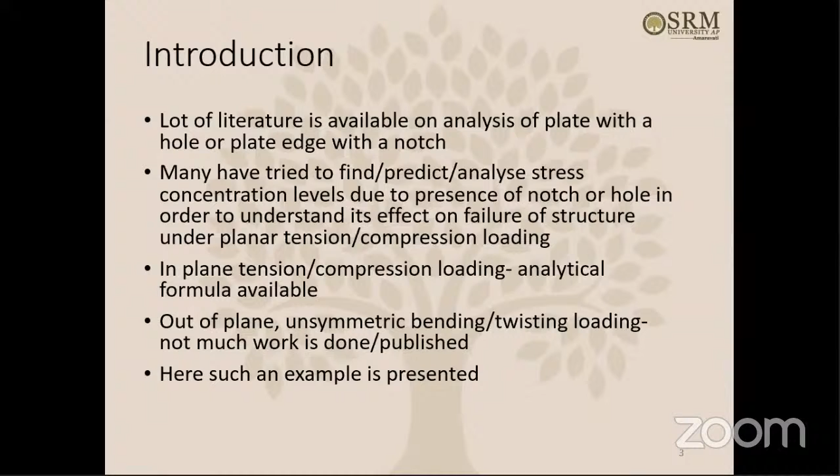So you cannot apply those simple analytical formulas or theories of tension and compression for plane structures. This is basically out-of-plane, unsymmetric bending, twisting - a lot of things are happening. So this is a blade here - as you can see, it's curved along the length and curved along the width also. One side has a leading edge made of metal, and the remaining structure is all composite.

The other side is called the trailing edge. The side on the left is called the leading edge, and the side on the right is called the trailing edge. So what is proposed here is, can we implement a wavy shape on the trailing edge side?

Why do we have to do that? If instead of the straight edge on the right side we implement a wavy structure there, that will add some aero efficiency benefit. The aero efficiency benefit is only like 0.1 to 0.2%. It's not high, but in terms of aviation it is very high because it can have a cascading impact on other things. So even 0.1 to 0.2% efficiency benefit is very high in terms of aviation.

So if we implement those wavy shapes on the right hand side of the figure, that is the trailing edge, it's going to give some benefit. How do you implement that? As you can see, the blade is not a planar structure - it is curvy both lengthwise and widthwise. The design criteria for this blade is, of course, bird strike. A bird comes and hits the leading edge, and under that bird strike loading, the blade is going to bend lengthwise and widthwise. So it's basically a bending problem.

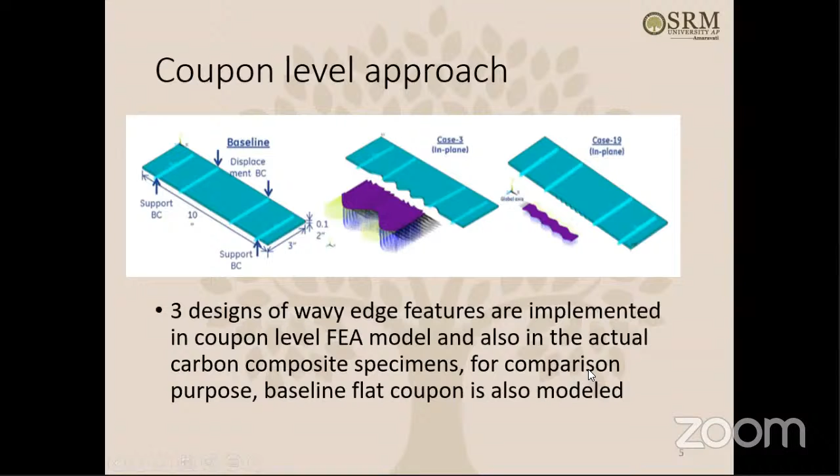We implemented this on one edge of the coupon, then did the FEA analysis, and based on this design we actually tried to fabricate the coupons. We fabricated the coupons, took them to the lab, and did this 4-point bending test. So why bending?

Because as we talked about earlier, under bird strike load the blade is going to bend lengthwise and widthwise also. So we're trying to create a similar kind of boundary condition here, a similar kind of loading condition that these coupons are being subjected to, they are bending.

Under the bending, of course you can see that the small wavy features show a different response, and the bigger wavy shapes show a different response, because when you bend the blade with bigger wavy shapes, they are not symmetrically bending. They go up and down, and also the failure happens differently.

So we put strain gauges, as you can see, exactly at the bottom point of this wavy shape. There's one strain gauge here, another strain gauge here, another strain gauge here, and one strain gauge far away from the wavy face. We put similar strain gauges on both coupons and ran the test. Strain gauges were used to measure strain level.

So what does it give us? The maximum strain far-field tension strain gauge shows these readings, then the far-field compression strain gauge, and then the scallop strain gauge. Scallop means one wavy feature we call one scallop, the second wave feature, third wave feature, like 3 scallops, 1, 2, 3, like this.

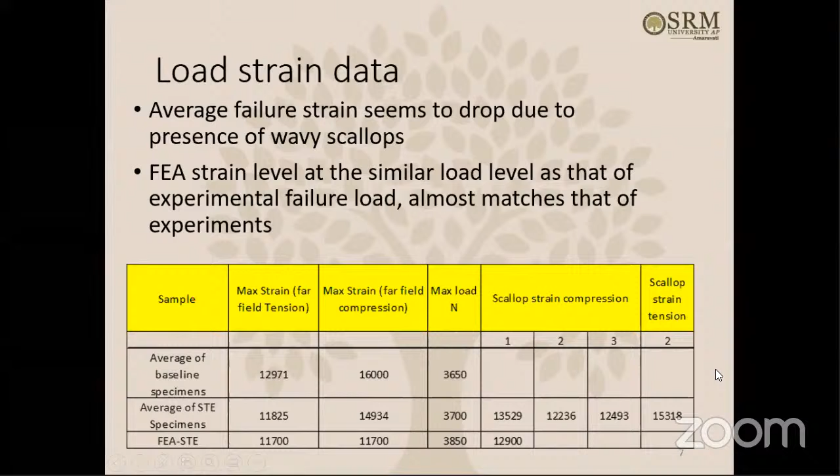So then the FEA model - there's some disturbance. Yeah, so the FEA model, as you can see, we tried to optimize it.

What we did is take the half thickness of the FEA model - if you look at the thickness here, the top half and bottom half - you just vary the modulus, the compression side modulus and tensile side modulus, and then try to match the results. That's just one way to match the experimental results with FEA, and that's what we did.

We found that trial 4 is giving good results, so that's what we use for further calculations. Then, the strain variation along the width for the baseline and other cases are plotted in FEA using the experimental failure load, and the characteristic distance is computed.

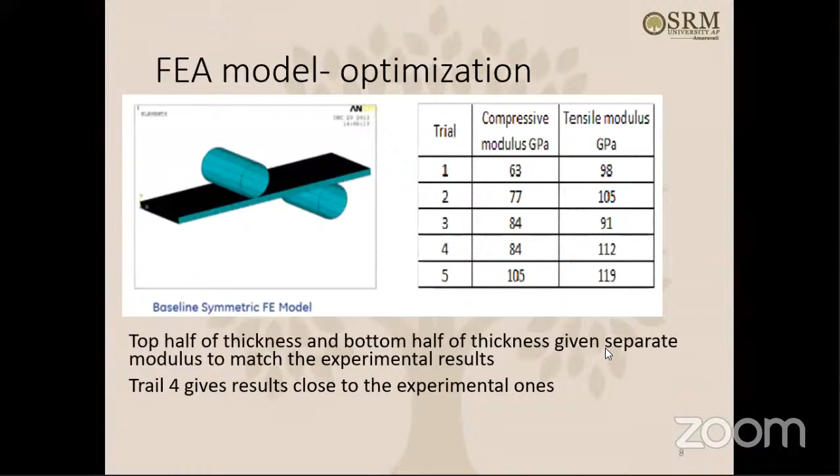If you look at the figure here, this is a coupon with a wavy feature, and there's a coupon without the wavy feature, that's the baseline. So the strain variation along the width for this wavy feature coupon and the baseline coupon - there is some distance from this bottom point along the width to the inside part, where the strain level comes down to the level that was there in the baseline coupon. That distance is called the characteristic distance.

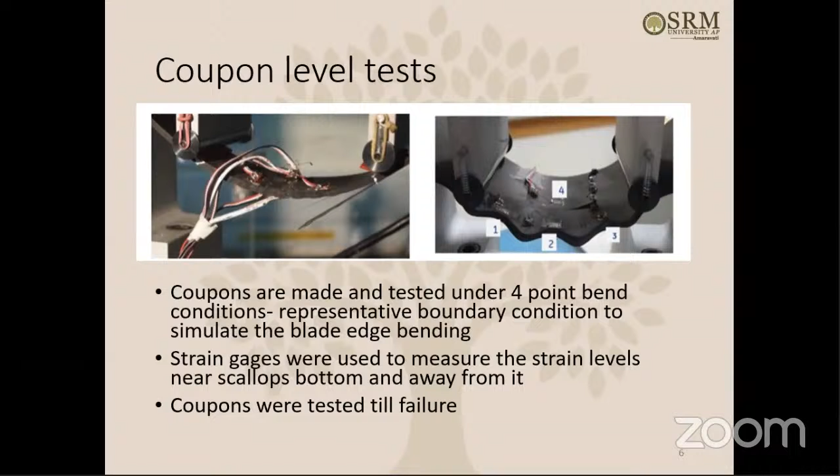So we are trying to find that distance in this analysis. The distance is like 0.25 or 0.62, for example. Compression side different, tension side different, like this, for case 3 and case 19. So based on the different variations of design, you are trying to find the distance - is it 0.62 or 0.25 millimeters?

So the load prediction at different characteristic distances is computed and plotted. That also we can do. If we have different characteristic distances, how can we predict the load? So failure loads can be predicted from the combination of experimental and FEA analysis.

Similarly, for other kinds of coupons like STE17, we can also predict the failure load at different characteristic distances using FEA and experimental analysis. And the prediction versus the real load - prediction values are very close to the real experimental failure load, as observed here.

So that's the characteristic distance I talked about. If we study the baseline coupon, case 3 coupon, case 19, STE15, and STE17 - these are just the different designs we were working on - for all these 4 designs, we compared with the baseline coupon, used the experimental results, and also used the analysis results to find this characteristic distance. The characteristic distance looks like 0.425, which is the kind of average distance that can be used for prediction of failure load for all the new cases.

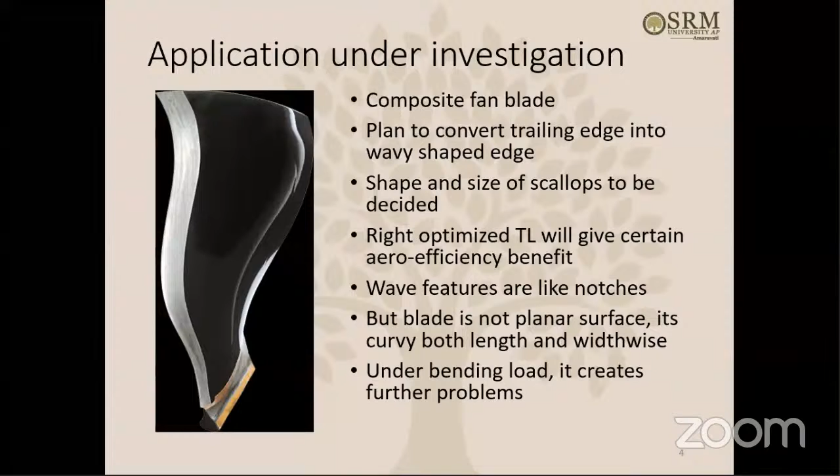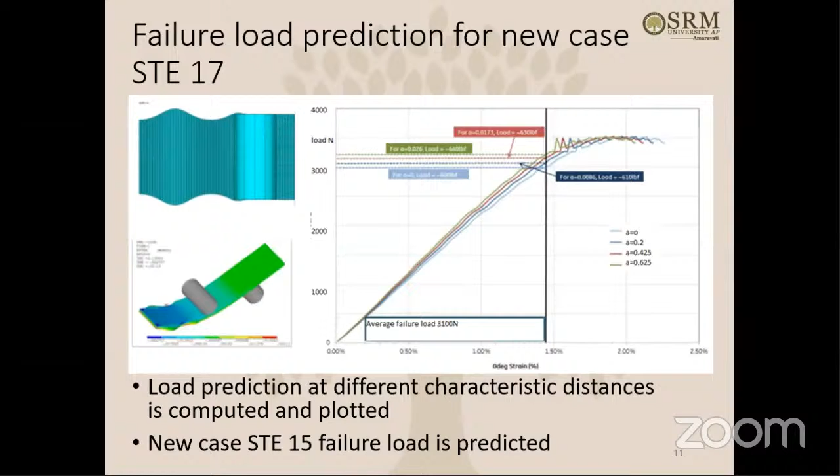If you decide to implement these wavy features on the trailing edge of the blade, you cannot manufacture the blade with, say, 25 designs of the wavy feature, because manufacturing and testing all of them would take huge effort, cost, and too many complications. That is why we are trying to develop a technique using coupon-level testing analysis, so that we can evaluate all these different designs at the coupon level itself and find out which design is better before moving to the blade.

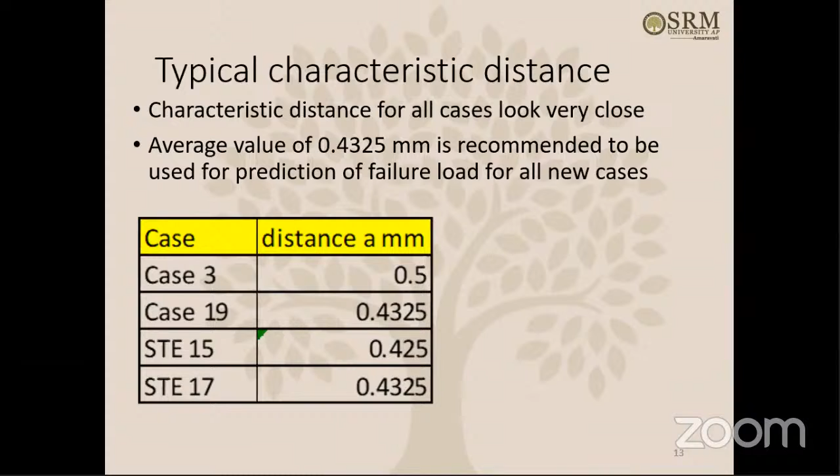So once we find this characteristic distance at which the strain variation meets the baseline level, that can be used to predict the failure load for new cases. The 0.4325 distance can be used to predict the failure load of new specimens, with no need to make new coupons and test them experimentally. That is the basic purpose of this particular analysis.

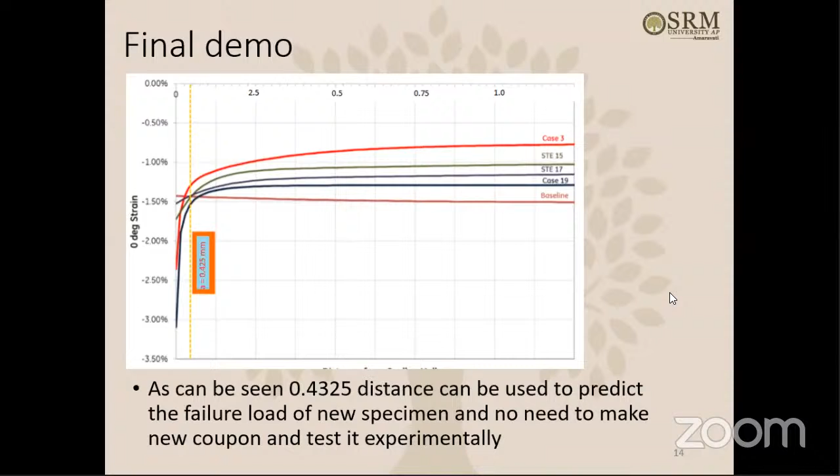So in conclusion, this is a new methodology proposed here to predict the failure load of new wavy edge specimens. How do you predict the failure load? Once we know the strain level for any new coupon, you can use the characteristic distance to predict the strain level. From the strain, you get the failure strain, and from the failure strain, you find the failure load. This methodology is proposed to predict the failure load of new wavy edge designs in the trailing edge, using a coupon-based approach where the characteristic distance is found through some initial testing of coupons.

With some initial testing of coupons, further testing of new cases of blade designs is not required. Directly, the failure load can be predicted for new designs using FEA modeling. So this is the conclusion of this work.

I have one more topic here, so let's talk about that.

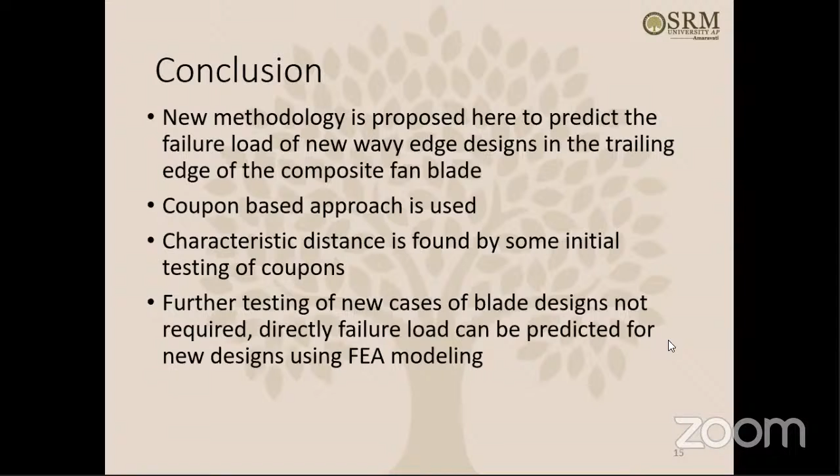So this is another topic, about indentation. You must be aware what indentation is. You use some kind of metal indenter with a conical shape edge, and you indent any material. Basically, you take a simple test system and press that indenter along any surface, and it creates some impression there. You can actually measure the load and displacement while the indentation process is on.

So how can we use this simple indentation experiment to measure the in-plane residual stresses in aerospace structures? Where does this residual stress happen in aerospace structures? If you look at the aircraft engine, there are a lot of components inside, like blades.

Not the composite blade I'm talking about - here I'm talking about the actual turbine blades. The composite fan blade is at the front of the engine, so it does not get subjected to high temperatures, that's why they use composite there. But if you look at the turbines inside the aircraft engine, all the turbine blades are made of titanium alloys, and they are subjected to very high temperature due to the combustion happening there.

So how do you measure these in-plane residual stresses on those kind of coated components? We have devised this indentation technique, and we have tried to analyze the effect of these residual stresses. So this is what the project is about.

What is the motivation? The background is that residual stresses affect the structural integrity and reliability, and indentation testing is a simple and most effective way to measure the elastic properties of bulk material.

So what exactly do we do? We study the effect of variable biaxial in-plane residual stress field on the indentation elastic properties. How do you create this biaxial field? That also we'll see - application of thermal barrier coatings, residual stresses due to thermal mismatch, and experiment design considerations.

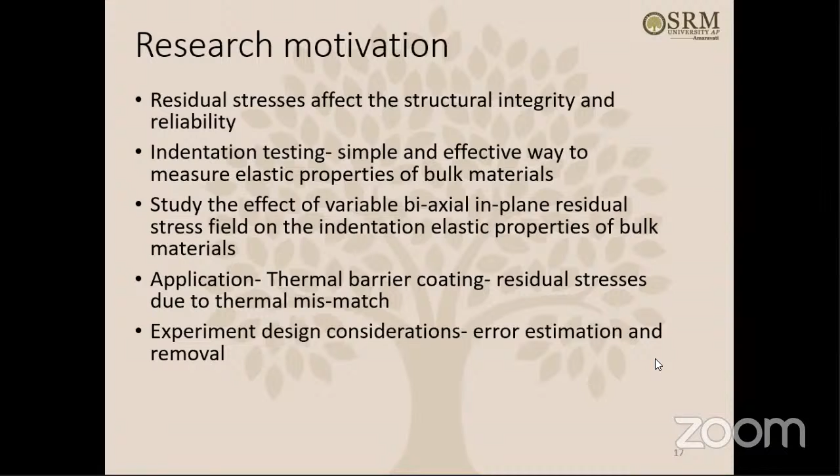While performing this kind of experiment, we also analyze other components, like what different parameters are affecting the experiment. So error estimation and removal, those things also we studied. Let's talk about it.

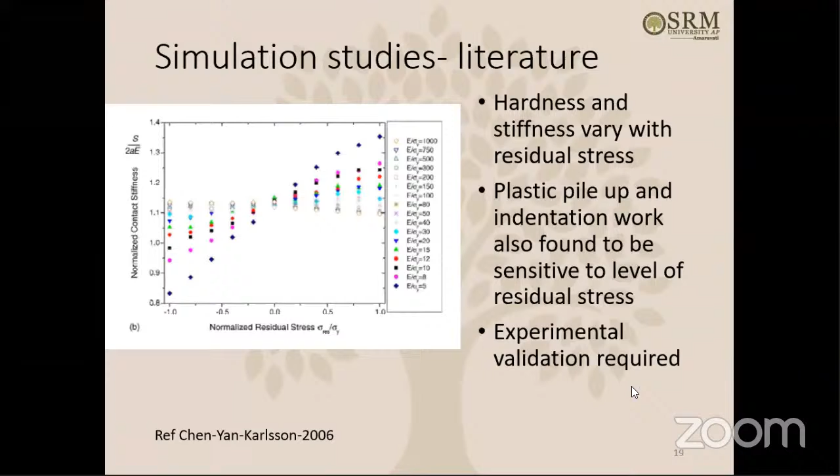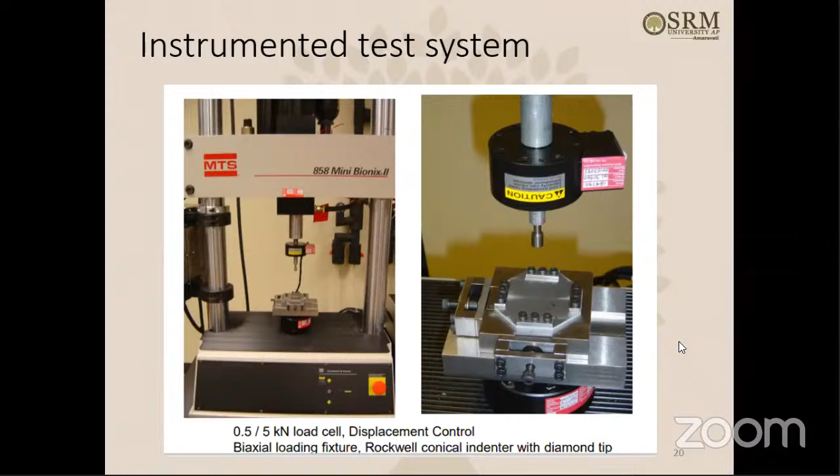So initially what we did is we did some FEA analysis on the specimen, and then designed the specimen like this octagonal shape specimen with all these holes for clamping like this. So it was designed in FEA, and then we manufactured the specimens for different materials.

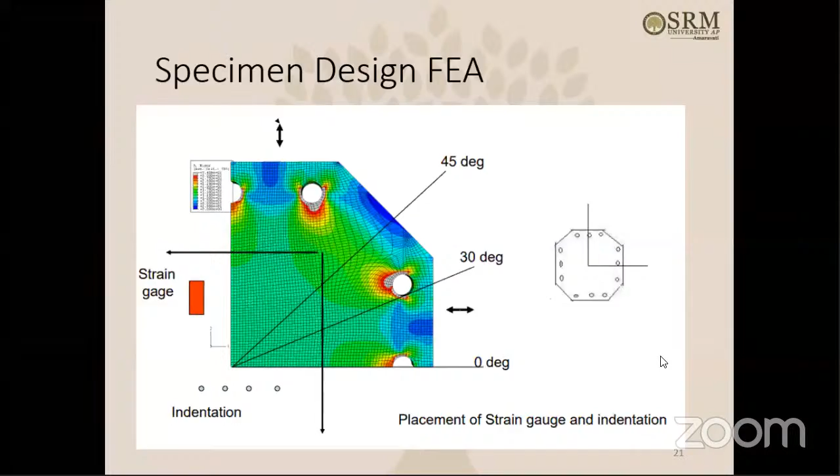And see, one side of the specimen is fixed here, this one side also is fixed. On the other side here you can apply tension or compression load, and this side also you can apply tension or compression load. So on the x-axis you can apply tension or compression, on the y-axis you can apply tension or compression, or you can have different combinations like tension X, tension Y, or tension X, compression Y, whatever it is. Different combinations you can apply - combination loading, biaxial loading.

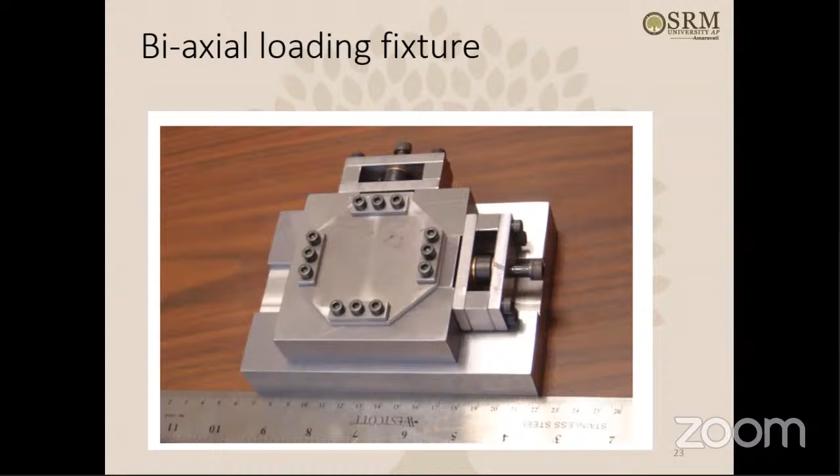So there were some errors that we found. When you do the loading and unloading plot, okay, and you test it and get a loading and unloading plot, and then try to estimate the modulus and hardness from that unloading curve, we found that there are errors in the value. So this is like if the modulus is coming as an overestimation - suppose the modulus of the aluminum is supposed to be 70 and we are getting maybe 90, 100, 150, then what is the reason? So these are the errors that we found.

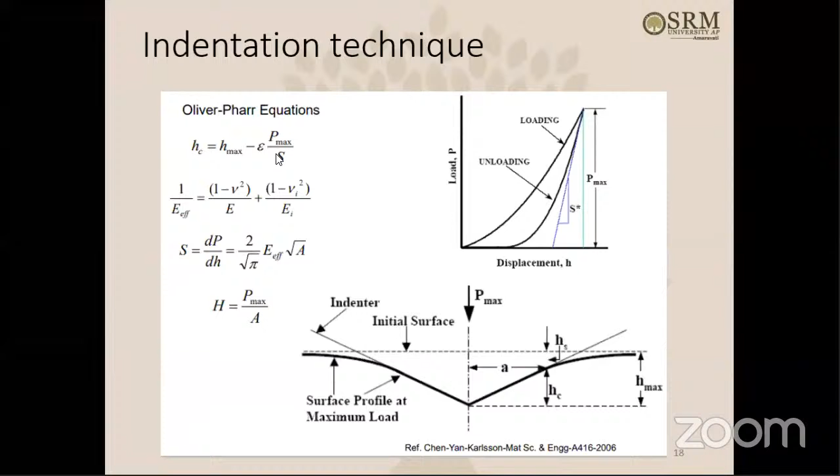Effective indenter shape - there is one geometrical parameter which ranges from 0.72 to 0.79. So depending upon that, we decide what to use. The parameter, if you see here in the equation, the parameter will be there. Here the parameter is there. So the parameter has a value and it affects the calculation.

Then pile up errors. Pile up errors - like this. So as you can see, when you indent the specimen, the conical indenter is coming down like this, and sometimes the material goes down when you indent it, and then when you pull it back - unloading - the material again goes up like this. First the material goes down, then the material goes up. So if it goes down, it's called sink-in. If it goes up, it's called the pile up. So if that thing is happening, then it shows a lot of errors.

So these errors have to be estimated properly, and then we have to come up with an approach to adjust for those errors. Sometimes it can overshoot - modulus can overshoot by 50% because of pile up errors. It's common for cold work soft metals, like large E over sigma Y, but it can be corrected. Then correction factor beta also varies within a range, so it can be adjusted, and then corrections can be done depending upon the shape of indenter, up to 10% of error in modulus.

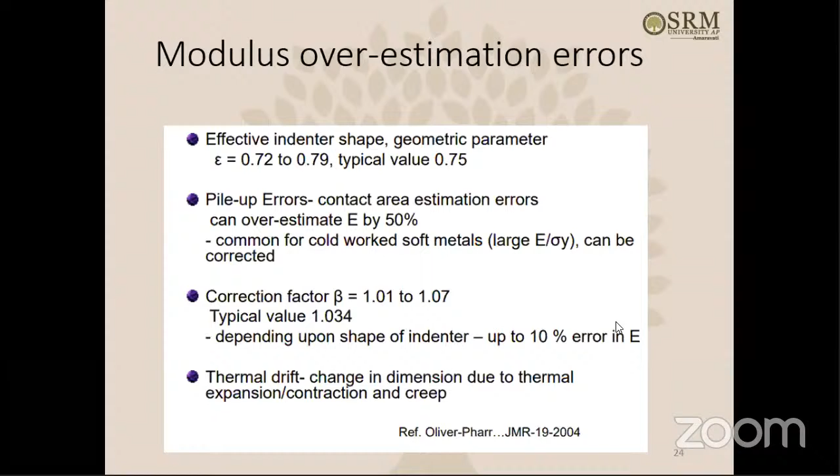Thermal drift - there is change in dimension due to thermal expansion or contraction and creep. Some materials are sensitive to this; when they are loaded, they generate some heat and thermal drift happens. So these are the errors shown here, like uncorrected and corrected because of thermal drift, or sink-in and elastic-plastic pile up - all these things are errors which are seen and which can be corrected.

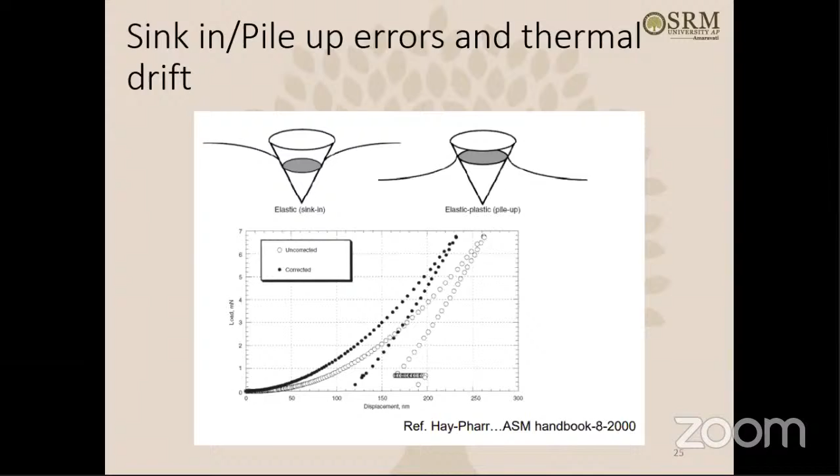Then as we talked about overestimation, sometimes it is underestimation. The modulus is underestimated in the sense that the correct value is supposed to be 70 GPa, but sometimes it is coming as 40 GPa or 30 GPa or 20 GPa - the underestimation. So what could be the errors for underestimation? Machine compliance, that is the loading frame - the loading frame has certain compliance, and something gets lost in that compliance. It can be removed by use of stiffer components, but of course it's not possible every time.

But if you can come up with some statistical correction equation, then you can use that and correct for this load frame compliance. Plate bending effect for thin specimen: if the specimen is very thin and supported on two edges, sometimes it may bend slightly. The specimen is not supposed to bend while doing indentation - it should be rigid, and the indentation should happen very smoothly. This bending effect also causes some underestimation of the modulus.

Then surface roughness, of course - if you are doing micro indentation, that's fine, like millimeters. But if you are doing nano indentation at the nanometer level, surface roughness matters a lot, particularly for spherical indenters.

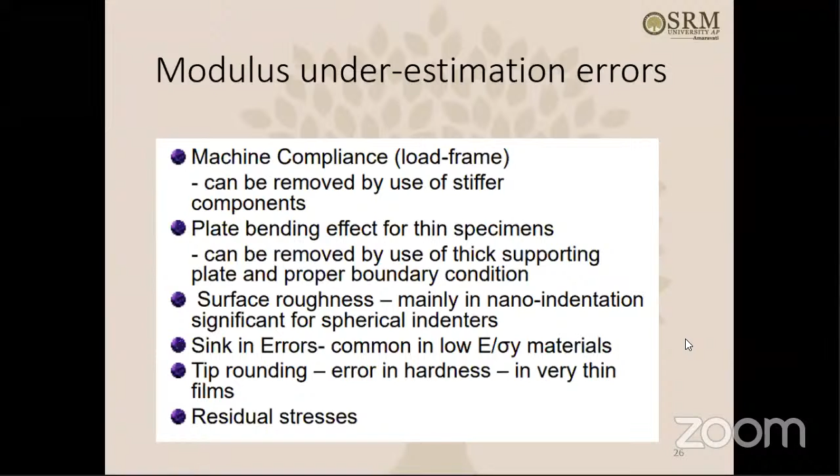Sinking errors and piling errors we already talked about. Sinking errors are common for low modulus materials. Tip rounding causes error in hardness for very thin films. Then residual stresses - these are all the reasons for underestimation of modulus.

So what we did for studying the load frame compliance is attach this indenter in a different way to the indenter holder, as you can see. This is a load cell actually, and this is the indenter. This is one type of setup - there is a steel holder, and from the steel holder there is another sleeve, connected to the load cell, and the load cell connected to the indenter. Then we tried using an aluminum sleeve here.

Instead of that, here a steel sleeve is used, and here the complete setup is different, as you can see. Different kinds of setups are used, and we saw that it affects the loading-unloading curves, and that's why it's affecting the modulus level. This shows that the load frame compliance has a big effect on this testing setup.

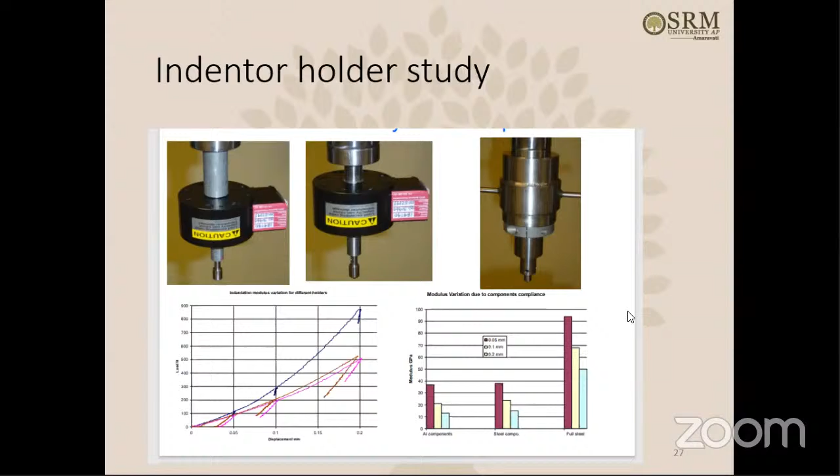Also, the effect of changing depth on the indentation modulus - if you do testing with different depths, it also shows modulus variation.

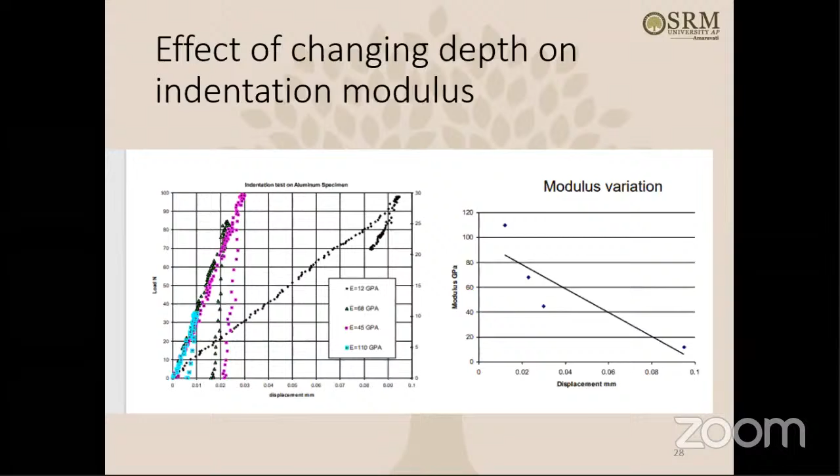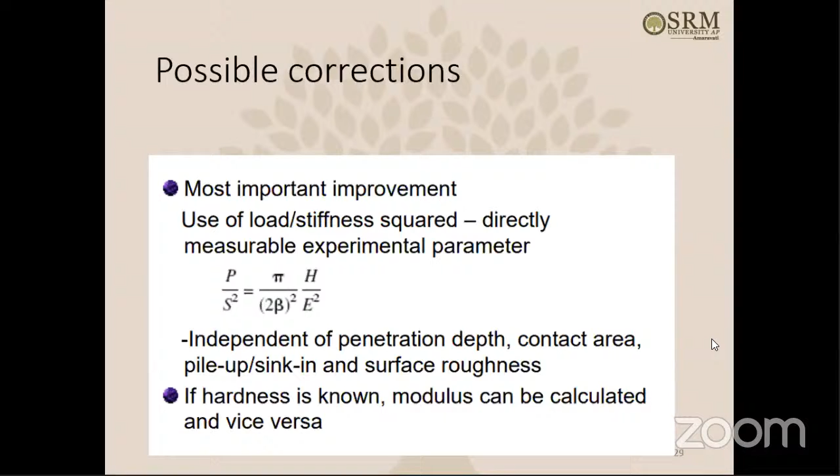So you can use this to adjust the compliance - if hardness is known, modulus can be calculated and vice versa.

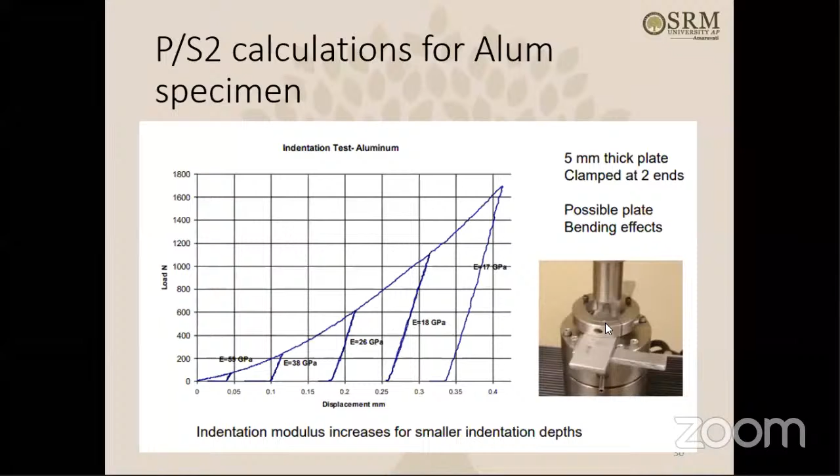Also the bending effect - if you have a specimen like this, thin, and you apply indentation, it may bend. So all those things are also there.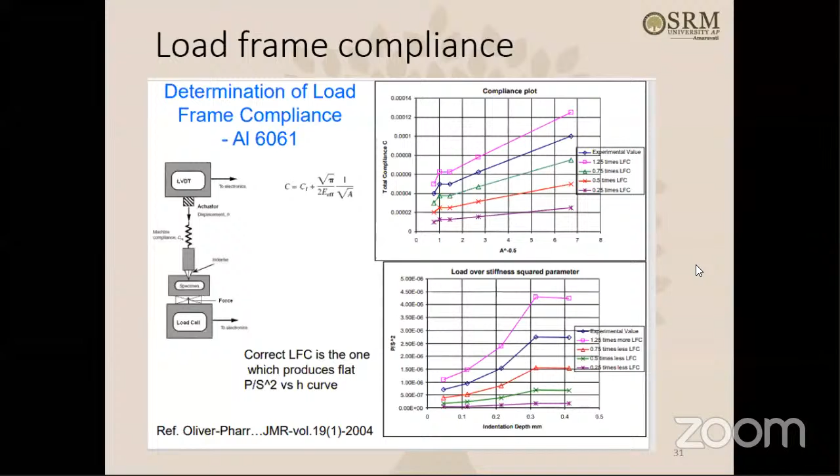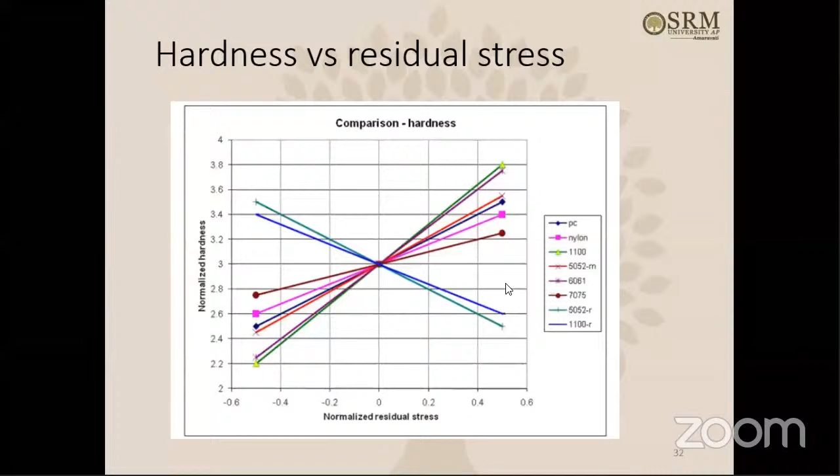This is the experimental result. It shows that as residual stresses in the material vary, some plots go from left to right increasing, while other plots are decreasing. That depends on the material—different materials respond differently. The softer materials give a different response, harder materials give a different response. This shows how the hardness varies along the residual stress.

So what is the use of all these studies we are doing? Now we have these charts ready. Suppose I am generating a data set using different materials of different yield strength and modulus, and generating a huge data set, then coming up with these plots. Next time, if I get some random material for testing, I take it and test it, and I can tell what is the stiffness and hardness from the indentation test. From that I can correlate to the residual stresses that exist in that material.

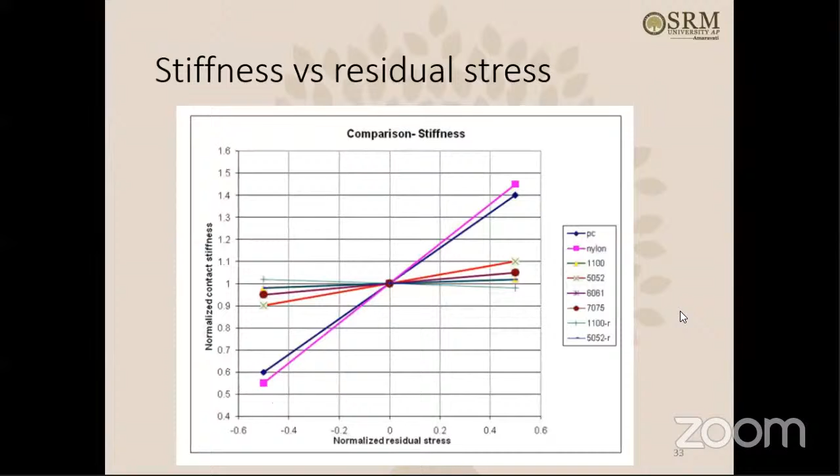This is the meaning of all this research—basically generating all the data sets. So the conclusion of this research is that residual stresses seem to have a large effect on the indentation behavior of bulk material. Over- and under-estimation errors can be removed by proper design of experiments, and this simple indentation technique can be used as a tool for identifying the level of residual stresses in thermal barrier coatings.

Sometimes this causes some very small damage to the surface, but it's insignificant—if you use nano level indentation, the damage to the surface is very small. So sometimes it is called non-destructive evaluation, because with just a simple small indentation you can find out the residual stress in thermal barrier coating. It's a very nice technique that can be used—it doesn't damage the material much, and you can immediately find out the residual stress. This is the conclusion of this research.